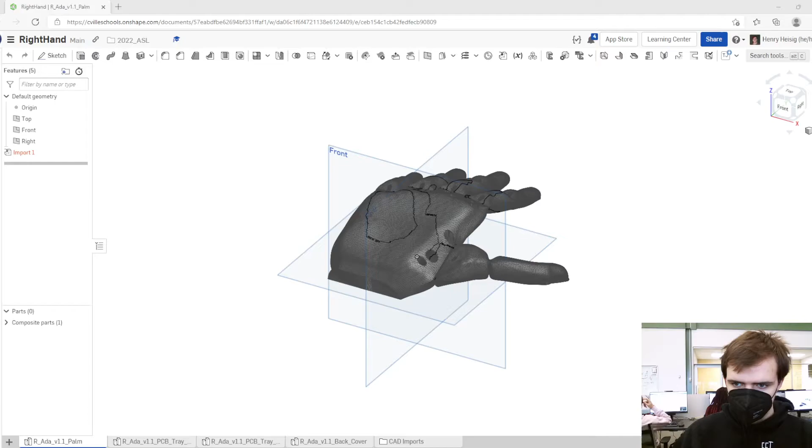Alright, so this is some documentation. It is currently February 25th, 2022, aka the last day of the project. But nevertheless, the show must go on.

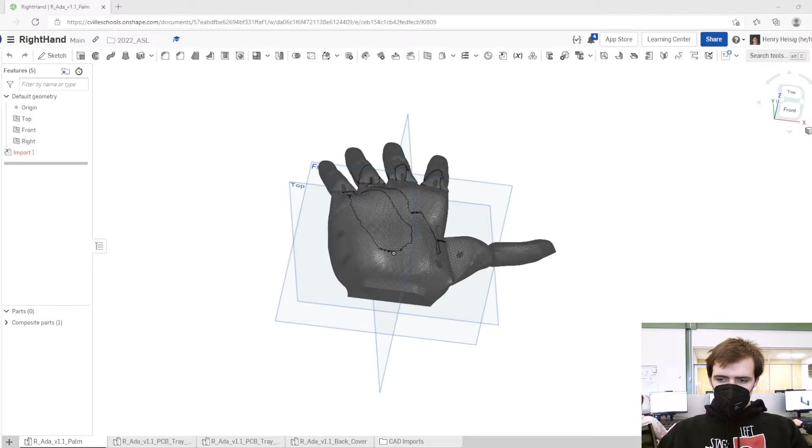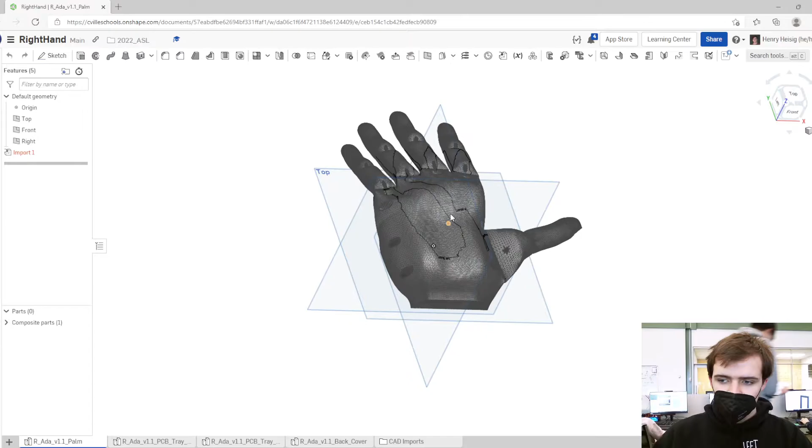So basically here I have the hand, and with this hand, this is the STL provided by Open Bionics Labs of the hand itself, specifically the palm part. There's more parts, like the PCB trays, etc., etc., as you can see. But then the palm itself here is really what we're printing out of the NinjaFlex and what we really want to cut down the size of, as I showed in the last video.

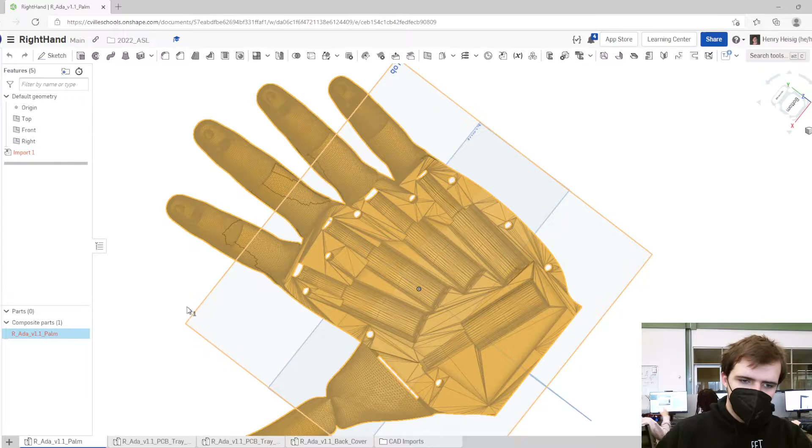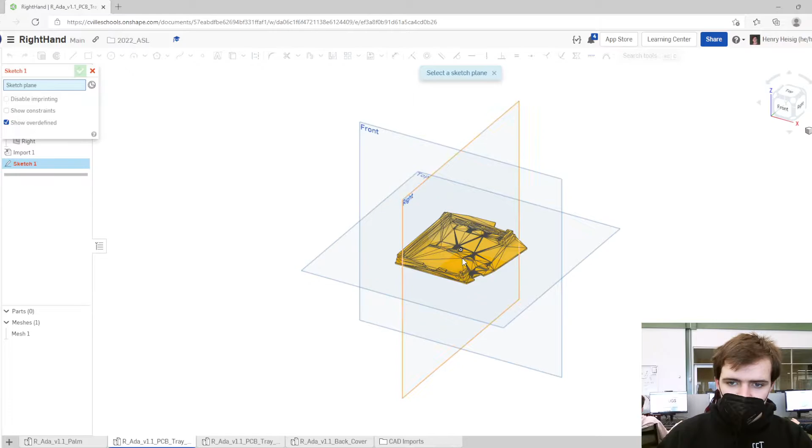But unfortunately, Onshape does not support editing of meshes, or in this case, it's a composite part made of multiple meshes. In this case, it says it contains faulty topology, but even in something where there's not faulty topology, it will not let you do anything to it. It'll let you select it itself, but otherwise it is largely only allowed to be there as like a 3D reference, in the same way that you could put an image in.

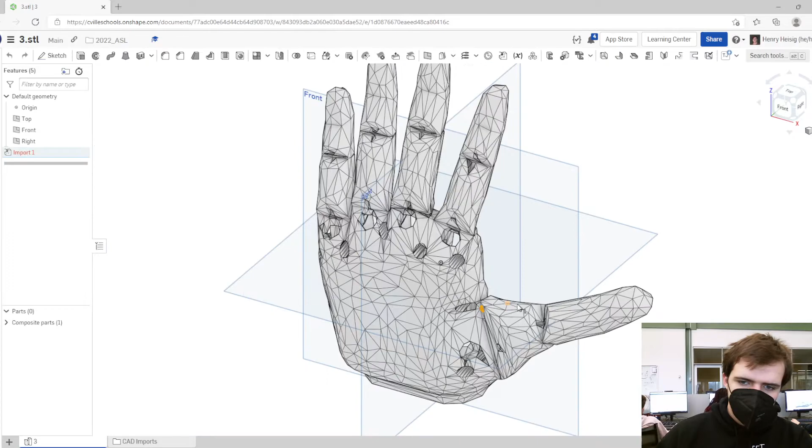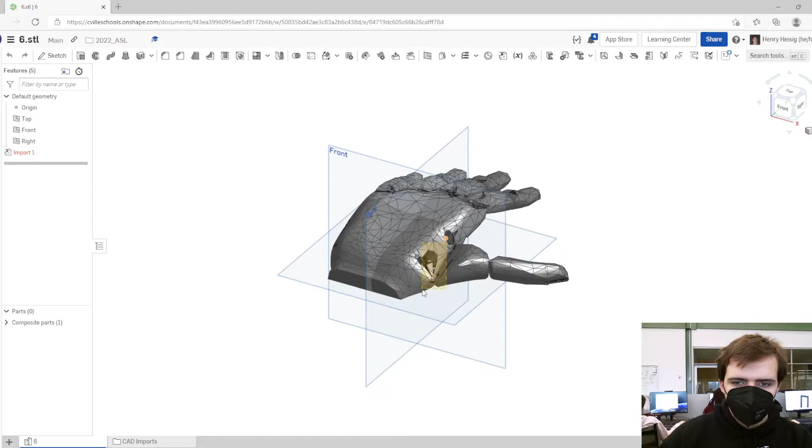And if we go to my documents, you can see there are quite a few attempts here. And if you look at these attempts, they were all me trying to basically turn this mesh into a solid wireframe, or just some sort of solid that could then be modified, so then just the fingers could be printed. As you see, I can select it, I can't extrude it, I can't do anything to it. If I go back, this is version 3. If I go back to version 6, again, I can do absolutely nothing.

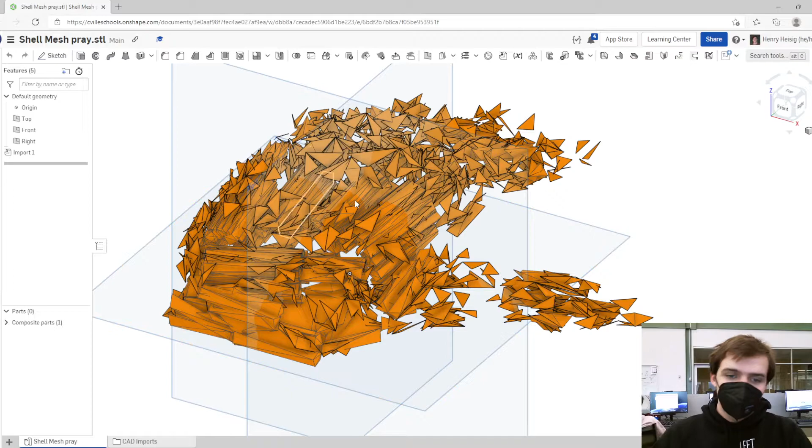Surface, solid, nothing. If I go all the way back to this, the final revision, in which I created a solid wireframe and just tried to keep it down to as little faces as possible. And when it imported, this was the result. And nevertheless, it still will not let me do anything to it.

And what I did is I opened up the STL file in an application called MeshLab that I used on my personal laptop, and I opened up the file, I created a solid wireframe, I decimated the faces to 5,000 - usually that's when I decimate and collapse them. I removed every single face that was intersecting one another, which I believe was the cause of the faulty topology warning earlier, and nothing I did worked. I tried exporting in different formats.

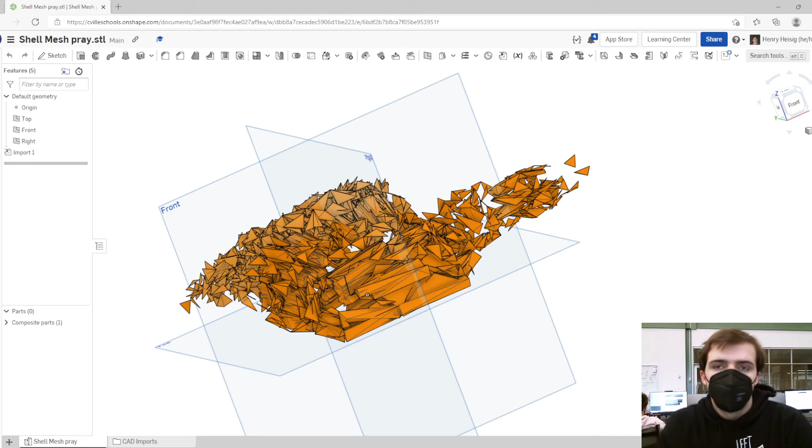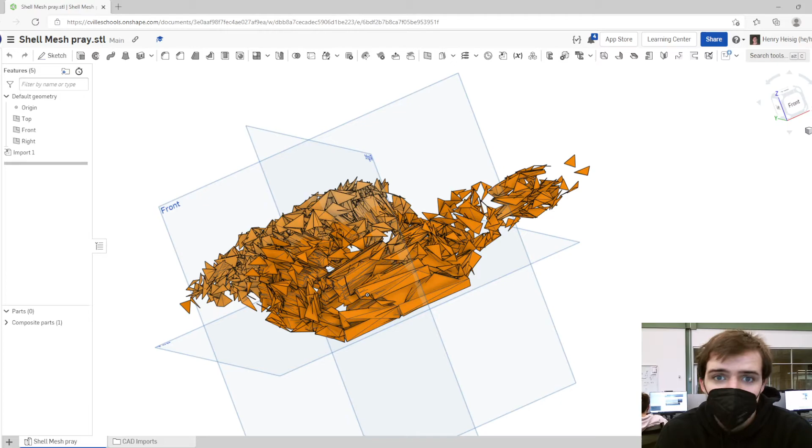So I believe that the best course of action here is likely just to, while using this mesh as a reference, redesign the fingers from the ground up, or print the hand as it is, and modify how we assemble it to work with servos instead of actuators, and a Metro Express instead of their custom almond PCB that Open Bionics Labs used.

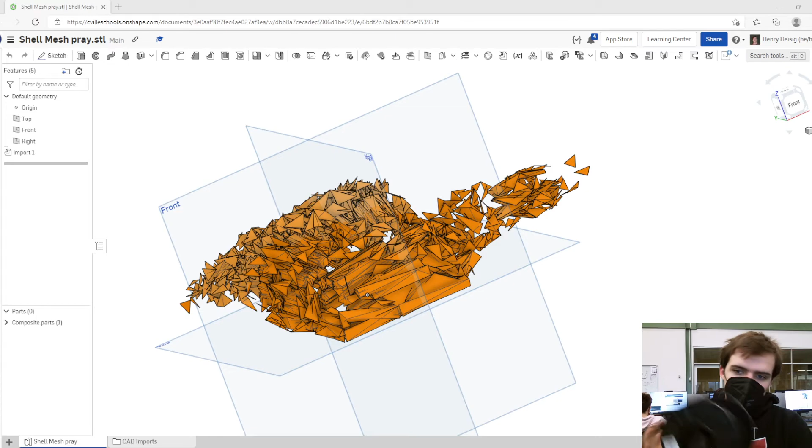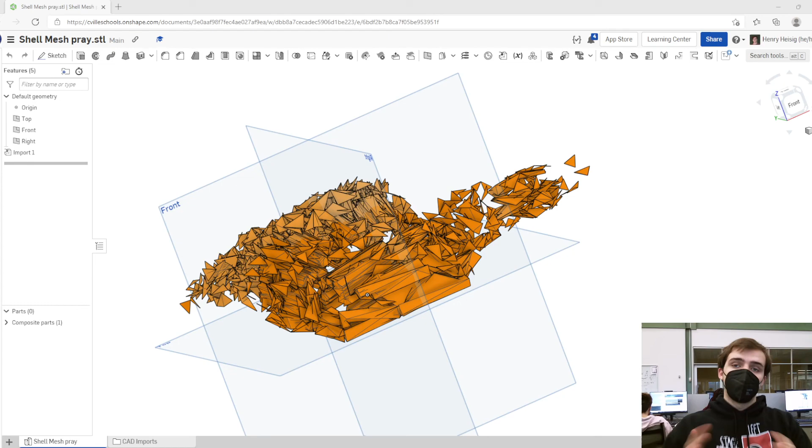Also, I forgot to mention, but what came in yesterday, I just got today, is half a kilogram of NinjaFlex filament, which is very, very flexible. I don't know if you can see it, but I'm just straight up bending this piece of filament when it's usually very brittle. And I will put a video of, instead of having to scrape it off a 3D printer bed like you usually would, you can literally just peel it off, which is ridiculous and so fun. But yeah, that's hopefully not the final video, but potentially the final video.